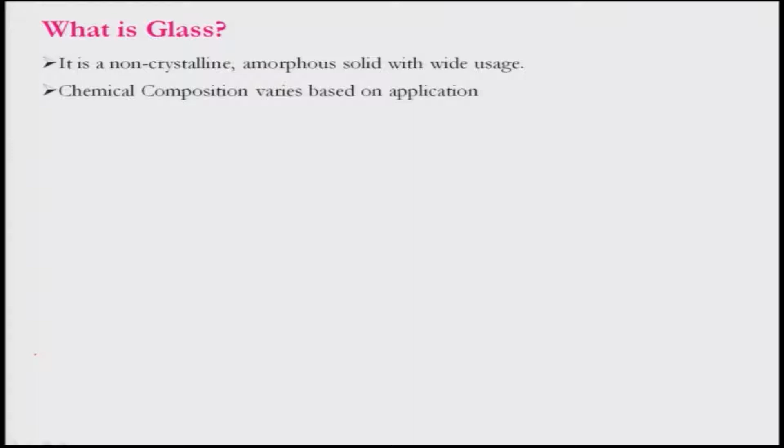The chemical composition of glass varies from place to place, and also it depends on applications. The main constituent of glass is basically silica, and of course, it has various forms. Glass generally contains around 75% silica, and the rest are additives like sodium oxide, sodium carbonate, lime, and various other coloring additives used for making glass.

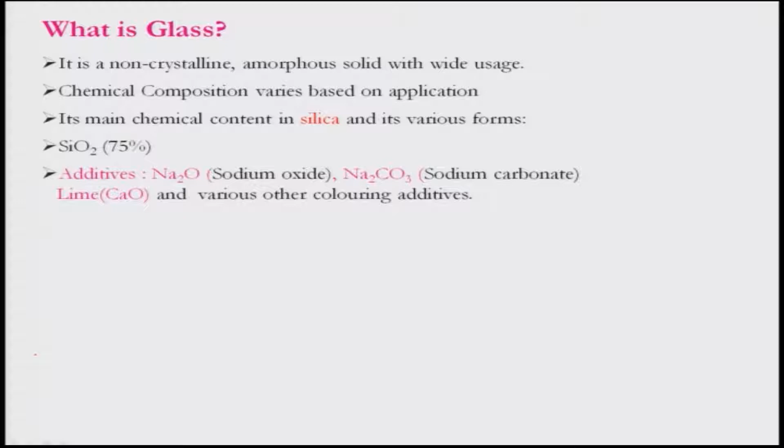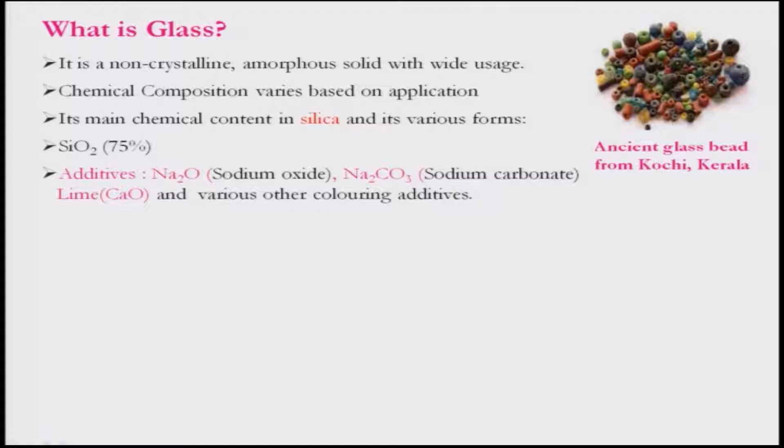Here I have shown some of the ancient glass beads from Kochi in Kerala, and we will be talking a little bit about the historical aspect later on. Let us see how this glass evolved. The vitreous paste, faience, and glazed pottery were known as the cousins of glass and its evolutionary stages.

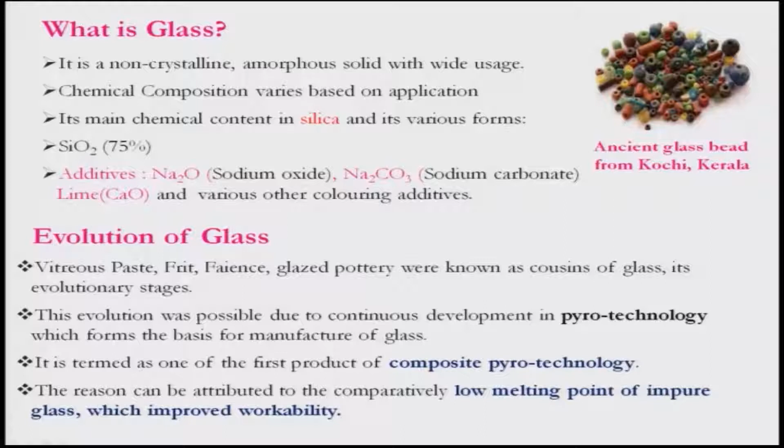And of course, it evolved due to the continuous development in pyrotechnology, which formed the basis for the manufacturing of glass. Later on, composite pyrotechnology was used. This pyrotechnology can handle low melting point impure glass. As a result, the workability of the glass can be improved.

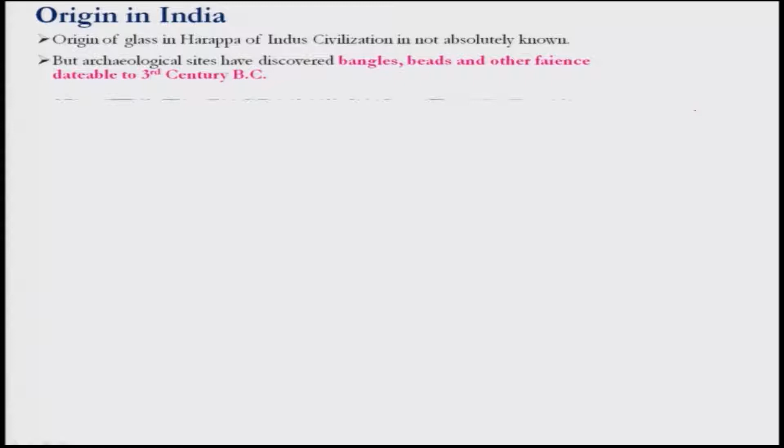Let us look at how and when glass originated in India. At Harappan sites, you will not really find any glass objects, as claimed by researchers. However, later on, around 300 BC, at some archaeological sites, people have found bangles, beads, and other faience items. From this evidence, one can conclude that the science of colored glass using cupric and cuprous oxide was known to Indians at least around 300 BC.

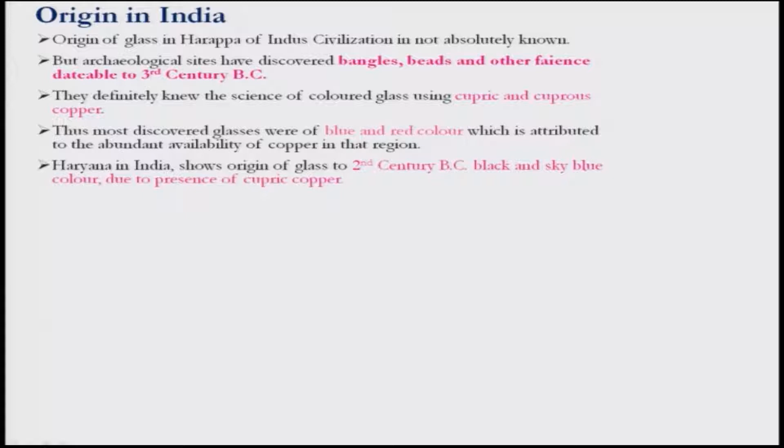Most discovered glasses were of blue and red color, which might be due to the abundant availability of copper in this region. In Haryana, around 200 BC, some glasses of black and sky blue color were obtained at the excavation sites, which may be due to the presence of cupric copper.

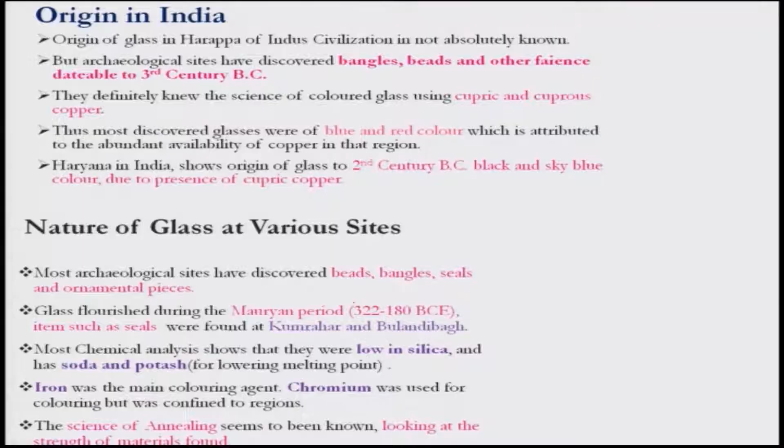As for the nature of glass at various sites, most of the archaeological sites have yielded beads, bangles, seals, and ornamental pieces. Nowadays glass is very cheap, and we use it for various other applications, like optics, laser glass, and several other places. But at that time it was considered very precious, and it was used for ornaments.

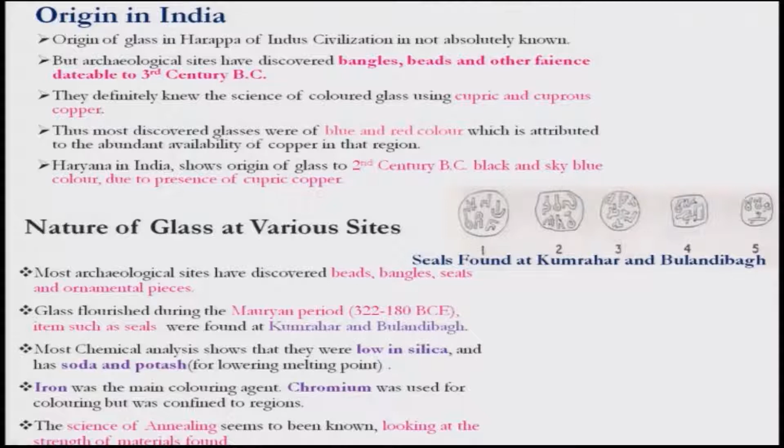Iron was used as a coloring agent, because iron was available in the eastern part of the country and some other parts as well, and chromium was used for coloring but was confined to certain regions. Here I am showing you a glass seal of 2.4 centimeter square and 10 mm thick, which was obtained in Maheshwar, MP, along with other seals in Taxila. This is the one, which has an amber color.

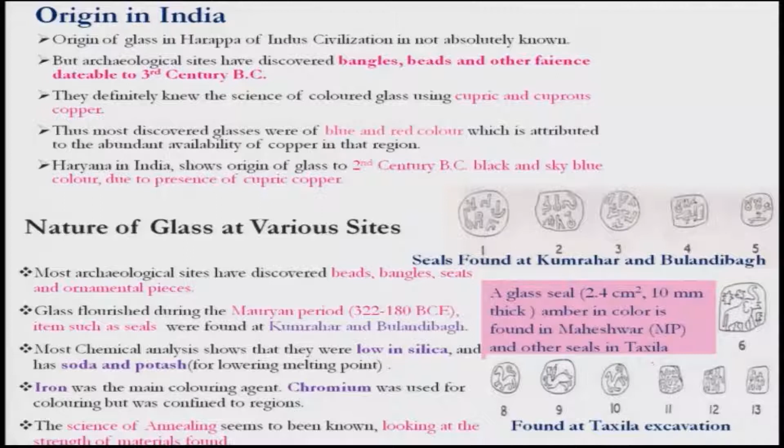Several seals were obtained in Taxila during excavation, with different motifs. From this one can conclude that the science of annealing was known to ancient glass makers, because the strength of this glass was quite good, which would not be possible without annealing. That is a glass seal obtained in Maheshwar from 300 BC.

Glass discs and ear reels of different colors were found during excavation, and a black glass disc with a legend in Brahmi script in red glass is housed in the museums of the Patna, Banaras and Allahabad region. I must tell you that a lot of these excavated items are preserved in various museums across the country. One can visit, find them, and also do research on them. This disc might have been fabricated by pulling large glass canes, as people have anticipated.

Ear reels in good numbers have been reported from Ujjain, Maheshwar in MP, Nasik, and Kaundinyapur in the Vidarbha region, colored white, vermilion, opaque, blue and green. That means they were using a lot of coloring agents, or maybe some impurities were there. And this is still the Common Era, what was earlier known as the Christian era.

People claim that Western people, particularly from Rome, influenced glass technology in India, because there was trade between Rome and India at that time, and the local industry might have acquired some new glass making technology from the West. Particularly the glass bowls and mosaic tablets were imported, as claimed by some researchers, but more research has to be done to prove it, because the reasoning given by the researchers is not that sound. The presence of large glass tiles shows evidence that the local industry flourished at that time.

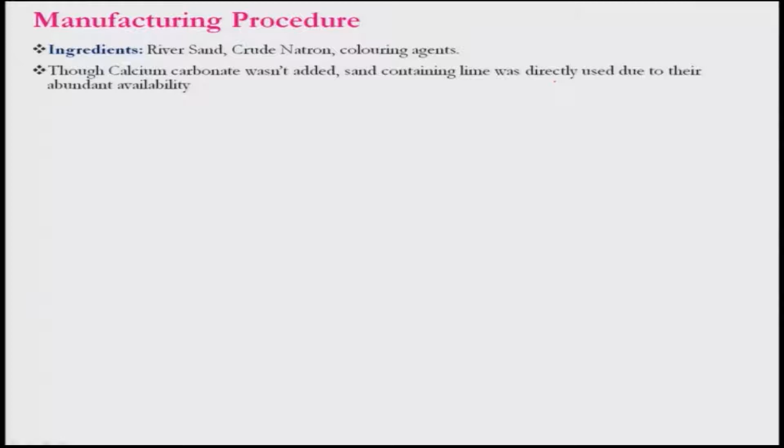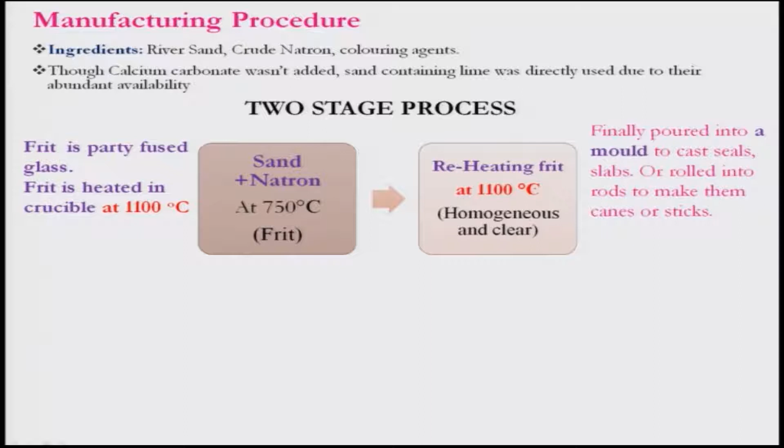Let us look at the two-stage process. First, the sand and natron were heated to 750 degrees Celsius, which produces frit - a partly fused glass. Then it is subsequently heated in a crucible around 1100 degrees Celsius so that it becomes homogeneous and clear. Finally, it's poured into a mold to cast seals, slabs or other things, or it can be rolled into rods to make canes or sticks.

The same casting process is being used here as we had discussed during the metal casting process.

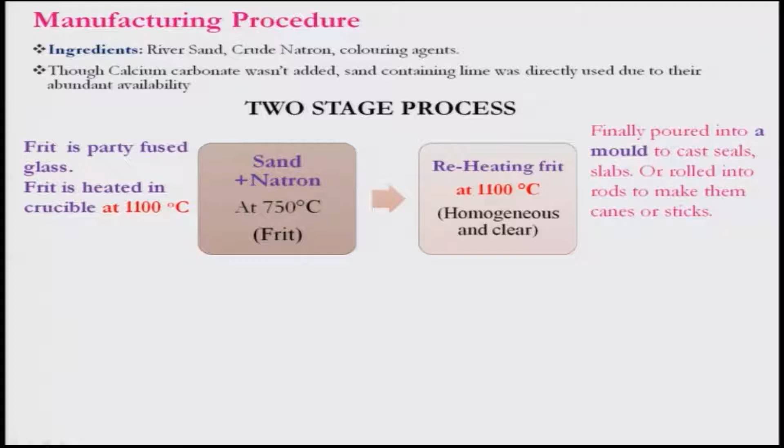The features of Indian glass: annealing of glass objects was carried out to improve the quality, and most objects were translucent, not transparent. Later on, transparent glass was made in the country, but in earlier days it was not. Chemical analysis reveals they have high alumina content but low lime content and low magnesia, and most ancient glasses are soda lime silica glasses, as I mentioned, because the melting point will be very low.

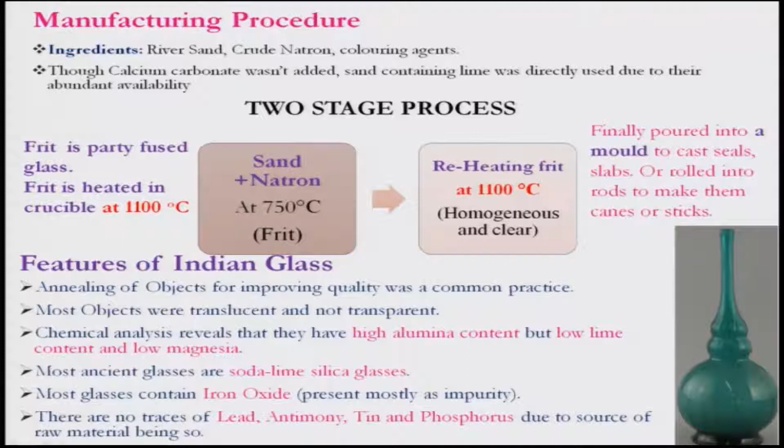Even today people are using this type of glass for making beads and other things in UP and some other places. Most glasses contain iron oxide because it was profusely available across the country, either as an impurity or added deliberately to color the glass. There are no traces of lead, antimony, tin and phosphorus, due to the source of raw material being used.

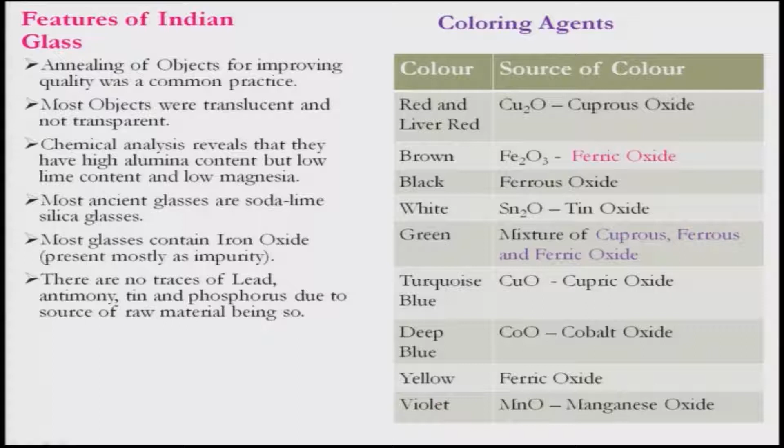Let us look at some coloring agents: cuprous oxide is used for red and liver red, ferric oxide for brown, ferrous oxide for black, tin oxide for white. For green, a mixture of cuprous, ferrous and ferric oxides were used. For turquoise, cupric oxide is used, cobalt oxide for deep blue, ferric oxide for yellow, and manganese oxide for violet. These are the coloring agents used in ancient times for making glass.

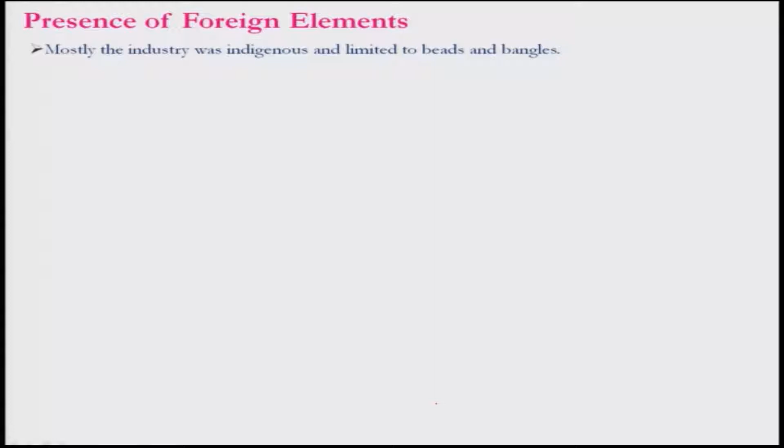Some people talk about foreign technology having come in, but mostly the industry was indigenous, limited to beads and bangles. That is, the indigenous technology of glass making was limited to beads and bangles, as claimed by some researchers.

If they find lead, antimony and tin in some of the glasses, they always say this is of foreign origin, but I really couldn't say why, because lead was here in this country, tin was also there. So why they say it is of foreign origin is questionable. Potash glasses having high silica content also give an indication of Roman glass, and potash is used in our rustless iron pillar I had discussed. So why these people are saying this needs more research to find out - because of these two reasons they are claiming these glasses are from western countries.

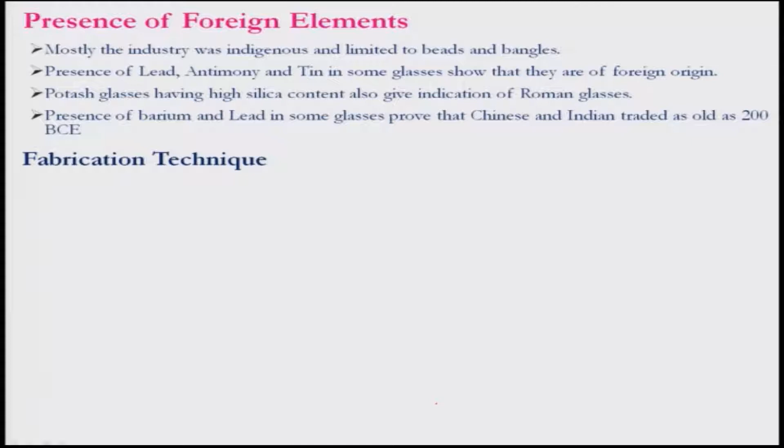You can find presence of barium and lead in some glasses, which proves that Chinese and Indian traders were active as early as 200 BC. Again, I do not know what they are interpreting. These are the logic given by researchers, which I do not think is right, or maybe right, I do not know, but more research is required to remove these doubts from people's minds.

So, a variety of glass objects were made in ancient times, and some of these are mentioned here, like bead making, and even till now we are making not only beads but also bangles and hollow wares and moulding glass objects through glass blowing processes.

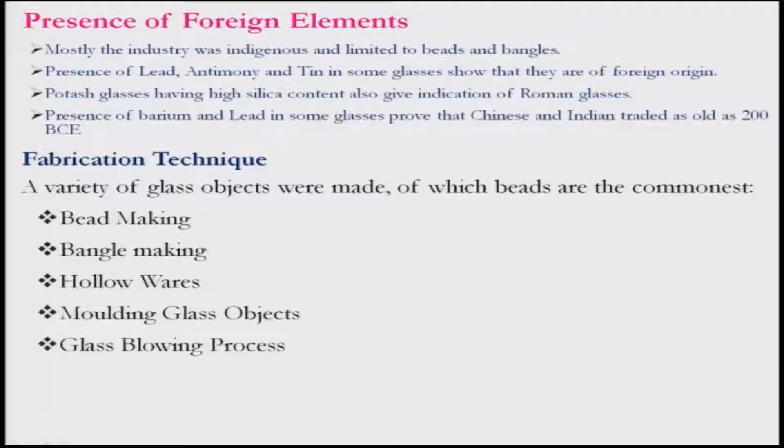So, some examples of medieval Indian glass I have shown here, it is very colorful and there are a lot of items showing how they are making this art. It is basically an art, looking very complicated, and also gorgeous and colorful.

Various tools were used for making glasswares in ancient India. I am discussing some of them here. One is sikha, basically a long rod meant for stirring the molten and semi-molten glass.

Tokkla is an iron rod with a thick butt and tapered point. The sarendi is a straight iron rod used for manipulating blown bubbles of glass, and citarna is an iron rod used for providing zigzag shape to bangles, because for making a bangle you have to give that shape. Saraganjana, shown here, is a long tapering rod of iron fitted with a wooden handle, used to separate bangles in a semi-molten state.

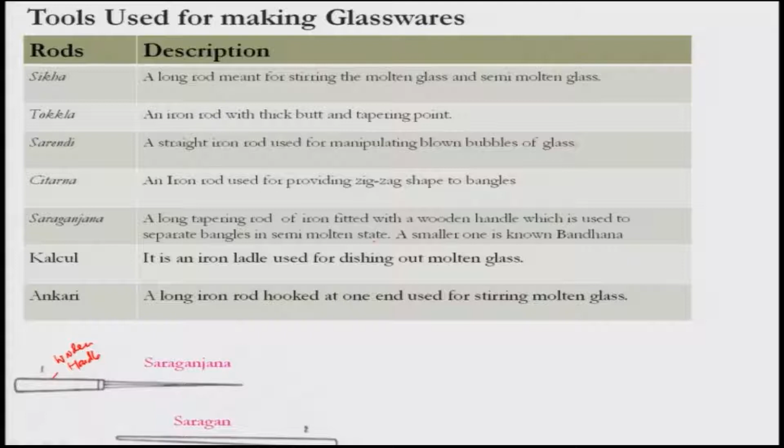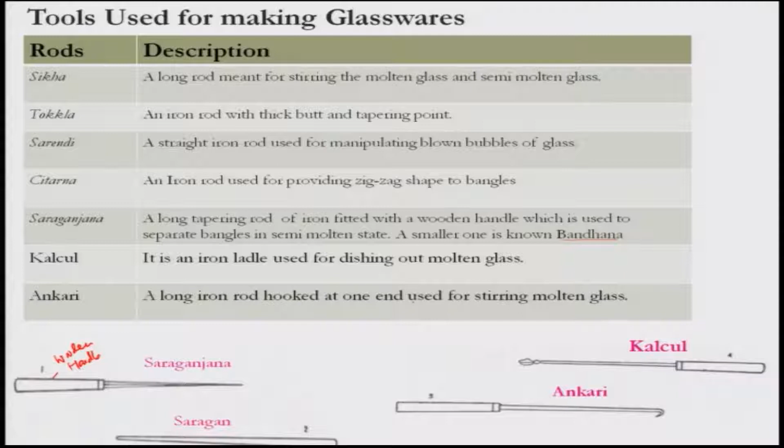The smaller one is known as bandhana. The kalcul is an iron ladle used for dishing out the molten glass. Ankari is a long iron rod hooked at one end, used for stirring the molten glass.

Let us look at the patha, a dagger-shaped tool used for pressing and molding glass in the molten state; a similar tool is also used for concrete work. The kalbut or thapi is a clay cone used for enlarging the glass bangle to the required size, and it will be rotated. I will be showing some of this in a video.

The null, or what we call phunkuni, is basically a pipe through which you blow the glass, and masha is an iron shear used to shape objects and separate them from the blow-pipe, basically a tong. Chimta, or simta, is an iron tong used to handle broken chips of glass, and the seal is a slab of stone used for marbling it.

So, let us look at bead making. First, the molten glass has to be stirred with an iron bar, as I told you.

A lump of this glass gathers at one end, and once that happens, another iron bar is fixed onto the lump, and another craftsman pulls this quickly, running with a pace, travelling to form a long rod. That is how the rod is made: suppose you have some glass, you move it at a little speed, so that the glass can be drawn out.

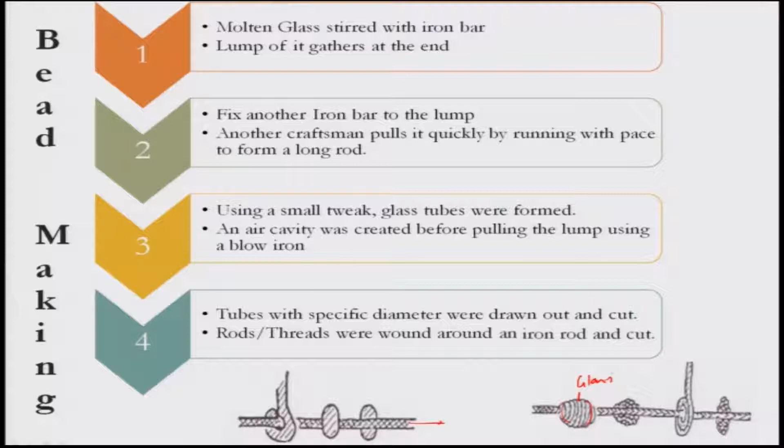I will be showing you a video of how a bead can be made. This again has to be rotated. If you take this glass stuck to an iron rod and rotate it, it will move through, and one bead can be made.

So, let us see how the glass bead is made. Here is a flame coming from the burning of liquid fuel. Nowadays people use kerosene, but in earlier days people used bio oil or vegetable oil, and there is a way of blowing air so you can get a blue flame, which is essential for making a good, uncontaminated bead.

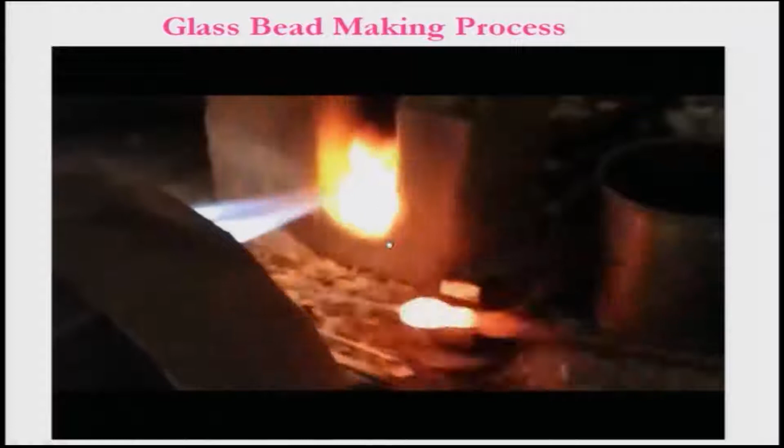So, if you look at what this artist is doing, he is rotating the glass which is on the iron rod. As it rotates, it takes a bead shape - basically a centrifuging effect occurs here. After that, he uses a die to get a proper shape and size. This is how the glass bead is made.

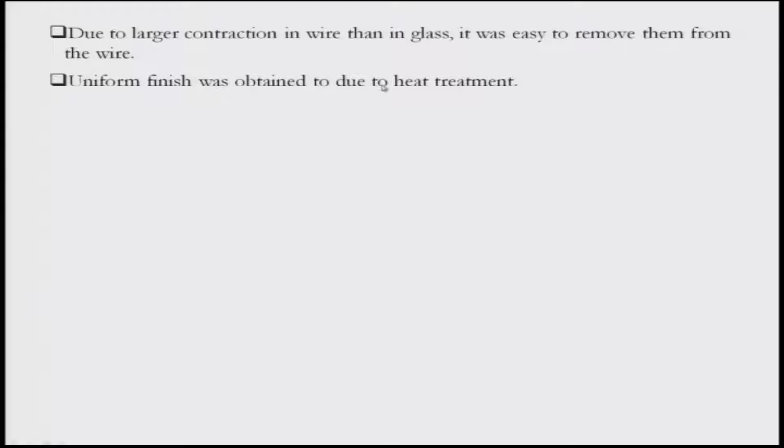Due to larger contraction in the wire than in the glass, it was easy to remove from the wire, and a uniform finish can be obtained due to heat treatment, because some annealing can be done.

Let us now look at bangle making. What is being done here? One has to take out a small amount of molten glass using an ankuri or a hook, wound around a spit to give it a ring shape. Then this ring shape is allowed to cool using a dagger and transferred into a cone, and the cone will be rotating. I will show a video to demonstrate that.

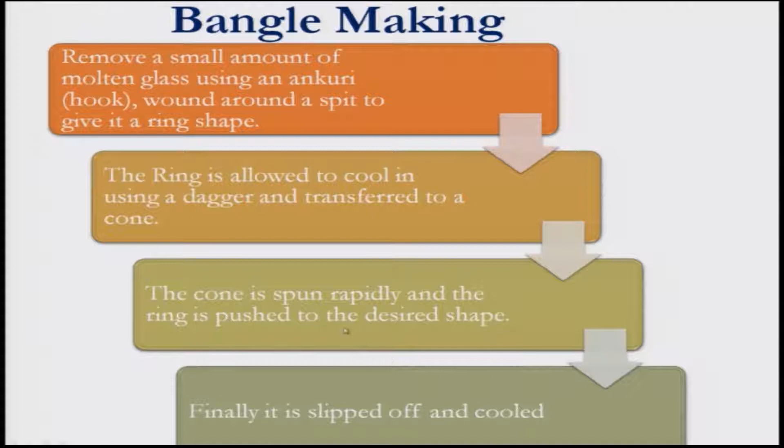As a result, the centrifugal force acts, and it is enlarged and takes a proper circular shape. The cone is spun rapidly and the ring is pushed to the desired shape. Finally, it is slipped off and cooled. This is a very simple technique even people use today, and you can call it centrifugal casting or semi-centrifugal casting, because the RPM is not that much here.

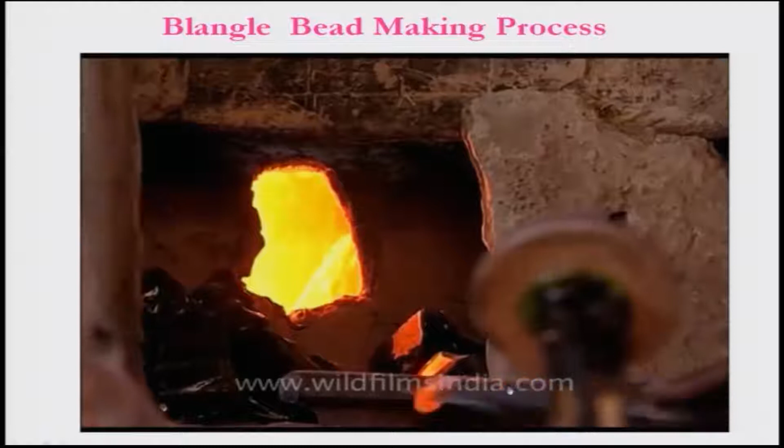So, let us look at what is being done here - some molten glass is taken, put into a round shape, and placed into this rotating cone, which enlarges it, and again it is taken and the process continues. So, this is the process by which the bangle is made.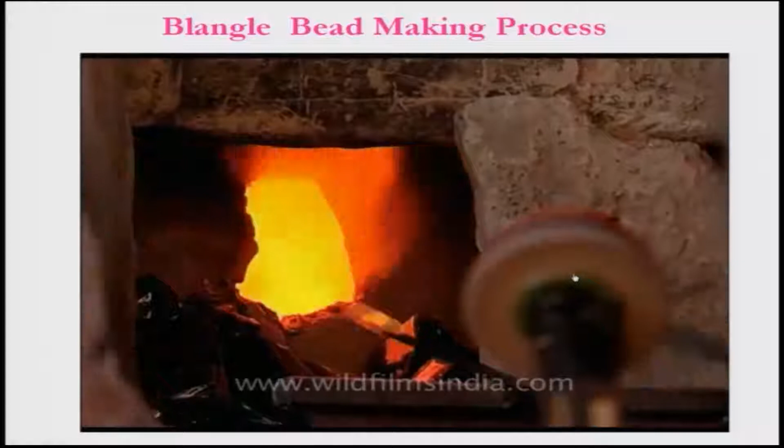Look at this cone which is rotating at a certain RPM, and depending upon the RPM it will get into shape and end here. There is a stopper, so that size can be managed with this stopper on this mandrel which is rotating.

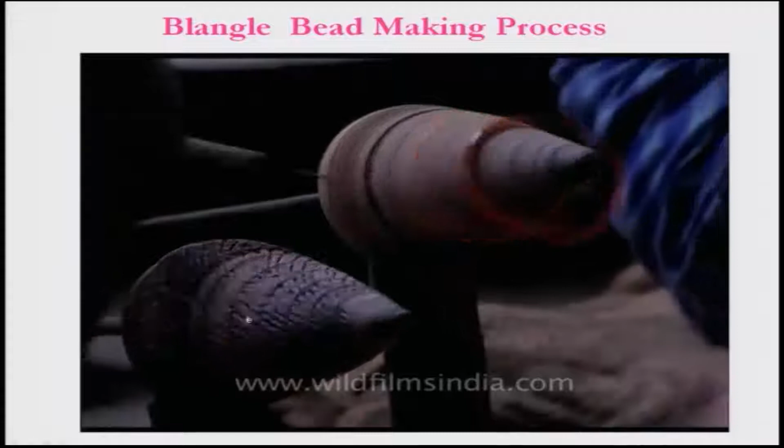Let us see now that hollow glasswares were being made by the core technique. These are some of the glassware from Gujarat I have shown, which is hollow - this is a glass we used to use in earlier days, nowadays we use plastic tumblers. Hollow glasswares are found in Devenimori in Gujarat, Amreli in Saurashtra region of Gujarat, Ter in Maharashtra, and other places, which were considered to be manufactured by the core technique.

What is being done here: a stick or rod housing a conical end is coated with a ball of sand held together by a cloth. Basically a cone was there, and sand is placed with the help of a cloth, and this is your mold - you can say one kind of mold.

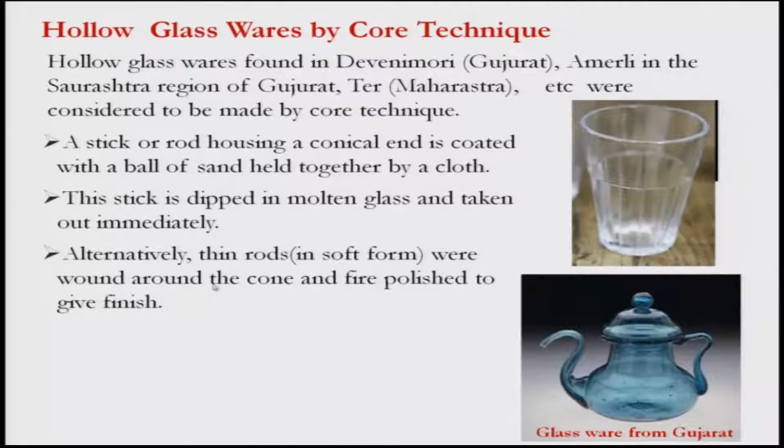This stick is dipped into molten glass and taken out immediately, and then alternately thin rods in soft form are wound around this cone and fire polished to give a finish. That means you have to go to the flame and try to melt the rest of the material out on the outer side, and you get a hollow glassware.

Finally, the core with the sand is removed on cooling, giving a hollow ware, because the sand was there, then you can remove the sand portion. Basically, sand is used as an insulating material also. For that you can have a mold and do that.

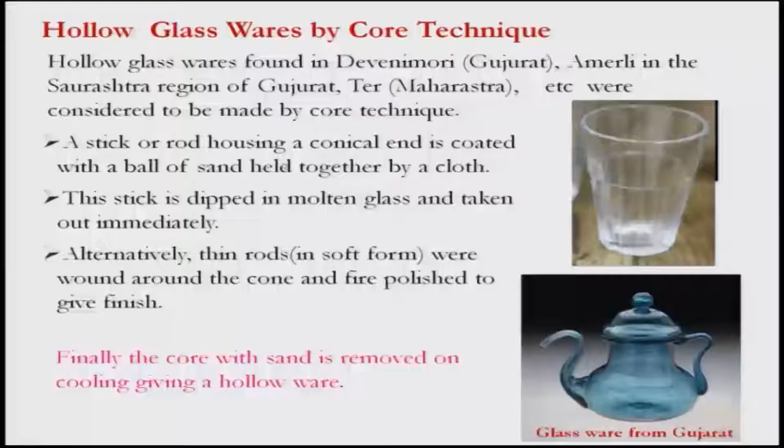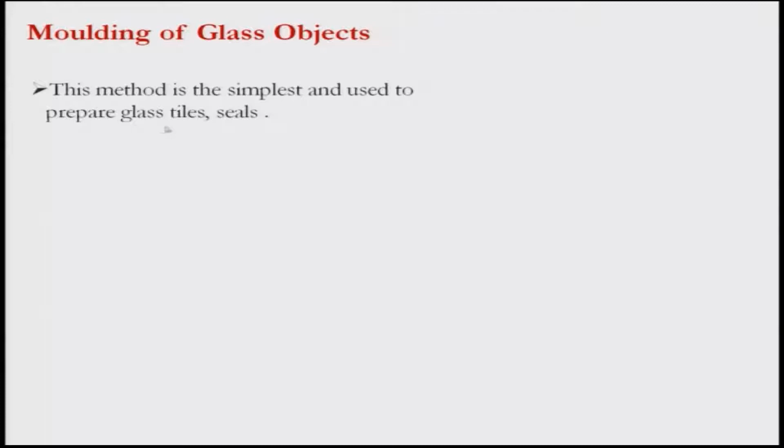So, this is a simple technique that was devised earlier and is being used. Let us look at the molding of glass objects. This method is one of the simplest and is used to prepare glass tiles and seals, and it follows the same metal casting procedure we discussed earlier.

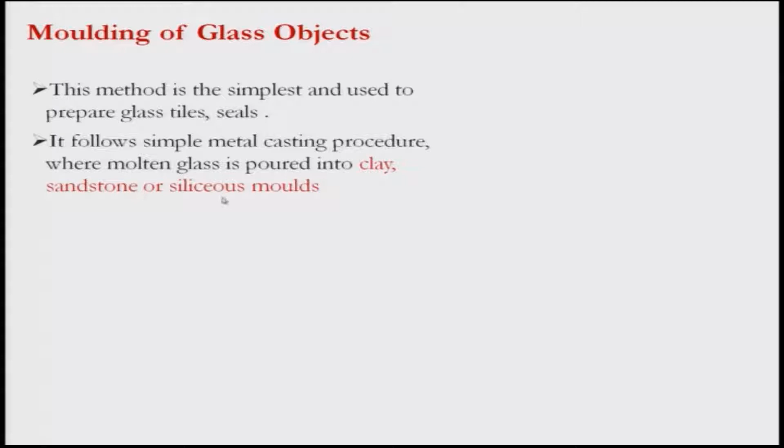First, the glass is to be melted, and then poured into a clay, sandstone, or siliceous mold - this diagram I've shown is not of ancient origin, but the present one. There is a mold already here, and you melt the glass and pour it, and it will slowly enter into this mold and take a shape, and you allow it to cool, so that you get a glass object out of this.

There is another technique, the glass blowing process, and this process is considered to be imported from a western country, particularly Rome. Blowing was done either way, either in a mold or in a free manner.

You can see, even in the glass blowing section, people do blow glass in a free manner, and that is an art, or you can use a pipe to blow that air in a proper manner. In the mold, a small lump was taken and blown, introduced into a bivalve mold that has two sides which can separate, and blown to fill it up. Whereas in free blowing, the lump is blown and then shaped using a polished steel or a brass board, so that you will get a proper shape.